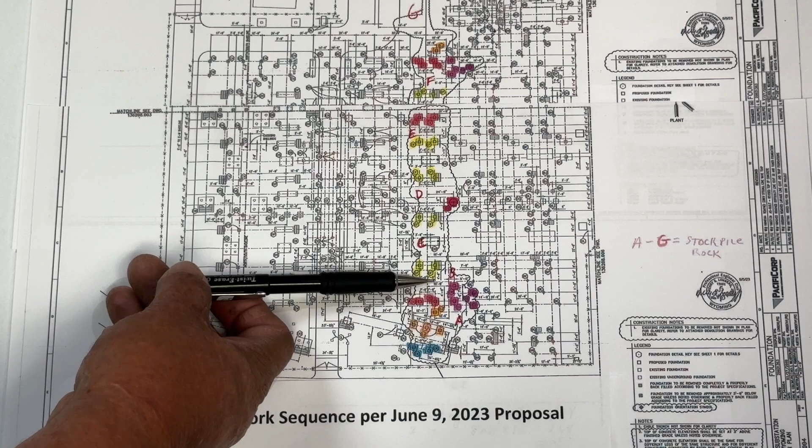Our original proposal was with no overhead, all demolition being completed, and level gravel to work off of. We were going to access through the gate, begin on the south, and work our way going north, getting these structures done. By the time we reached this section, which would be just south of the first breaker pad on the south, we were going to bring in our concrete crew and have them start excavating, forming, and pouring behind us. As we progress through here, they would be pouring behind us.

We could stockpile our material for backfill compaction at these locations, and as we worked through, they would pull from those to do their backfill and compaction. We're planning on working our way north and exiting through these gates out here.

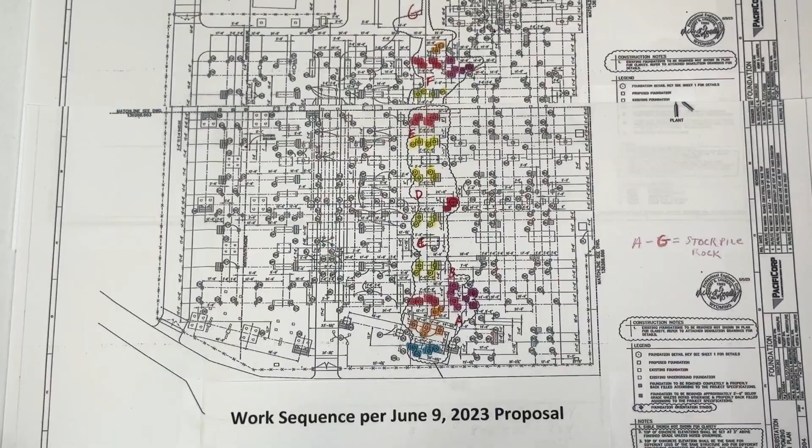Our original proposal was to come in with no overhead, no outages. Our secondary proposal was with an outage. We would come through, we would have to open up a gate in the fence. Then we could bring all of our equipment through here. We would lay out water tank, vac truck for our drilled shaft, spoils area, drill, man lift, concrete pump, concrete trucks.

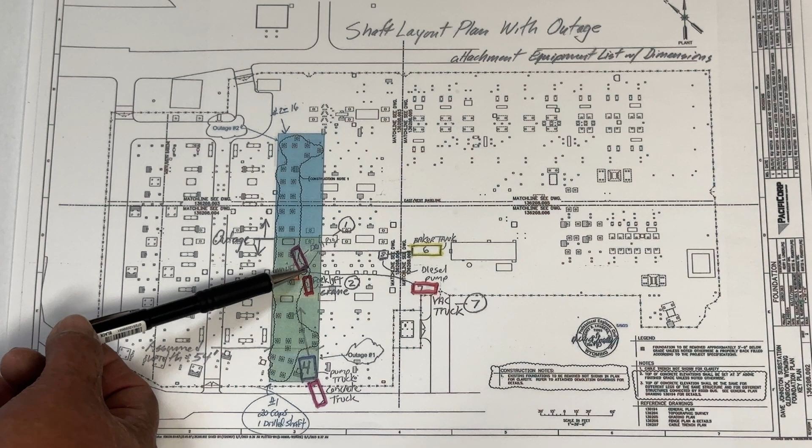We had this set up to where all of our equipment would fit in there, but this pushed off to the winter, which meant putting a water tank in, stretching this much line, bringing a pump truck in, trying to cure this and seal it in the wintertime became impractical at best, and eventually non-constructible.

This video is intended to show the as-built conditions after bidding, mobilization to site to begin work, and late notice of vacuum excavation. GSW was forced to do VAC-X potholing and trenching at all locations needing ground penetration. Terra Technics had to wait to follow them.

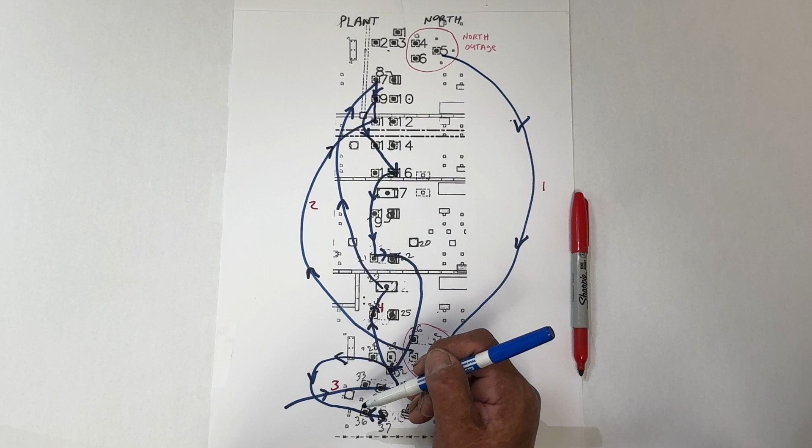Terra began on site on 11/30/2023 to install helical anchors and grillages for the north outage. No work was available inside the substation for approximately 1 week. Then Terra performed the south outage. The job site was then shut down for the holidays and for GSW to perform demolition, also to get ahead on the VAC-X.

On 11/17/2023, Wade called Danny Quinn over locates at test locations. I was notified that no setting of anchors was permitted. There was also to be a Teams call at 2 p.m. to discuss locates and test anchor locations. At 2 p.m., the Teams meeting required vacuum excavating all anchor locations.

The south test, picture number 2. Approximately 4 p.m., I met with Steve Nickerson and Annie of Dave Johnston Powerplant and was informed the southeast corner of the access road and line access road between the overhead power lines would be okay to drive anchors as nothing was underground there.

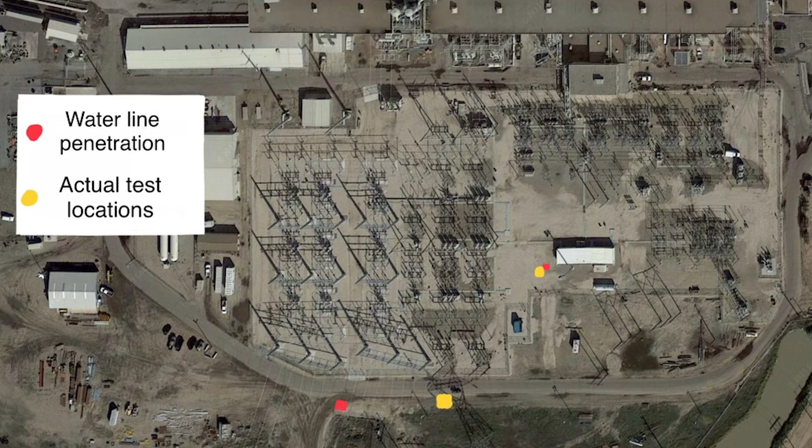On 11/18/2023, Steve worked with Terex Hydrovac and potholed both the north and south testing locations. Picture number 3. At approximately 1 p.m., commenced install test anchor at the north test location. At 17 feet, water was observed rising in the vacuum excavated portion of the hole. As groundwater is high in this project, we continued to termination depth of 24 feet.

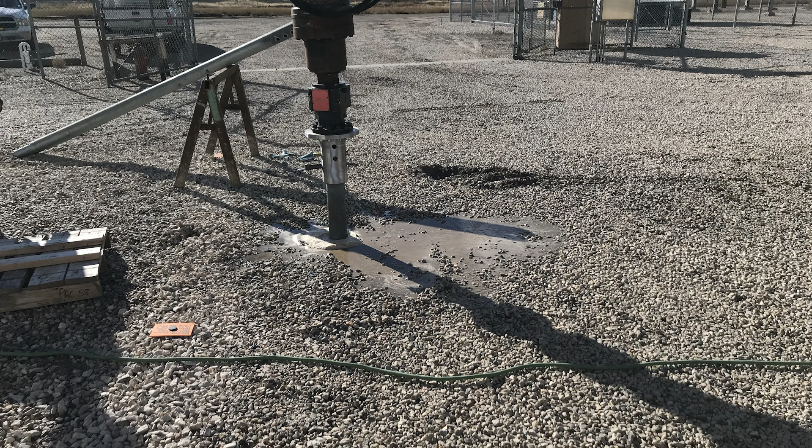Water continued up to ground level and began to puddle. At approximately 3 p.m., Steve Nickerson went to find a pump to keep water out of cable trays, and Terra Technics set up on the south test location. Picture number 4, 12-inch water line.

At approximately 4 p.m., Terra began reaction anchor A-4, then A-2, then the test anchor, then A-3. At approximately 4:30 p.m., Terra Technics struck a pressurized water source. Steve and Annie were both notified. At approximately 5:30 p.m., Annie asked Terra to remove the A-3 anchor and excavate to find source of water.

Water was diverted and Terra excavated to find a 12-inch HDPE pipe. A patch was located and Terra installed.

In conclusion, the impacts of cost associated with the change orders that we are discussing are the vacuum excavation, the time delay, and the delayed start of the work, the primary factors that we are trying to address in this message and illustrate with the information we've shared. We trust that the information conveyed in this video illustrates the complexity of the project, the constraints that we had to overcome, and accomplish the completion of this in the most efficient way possible.